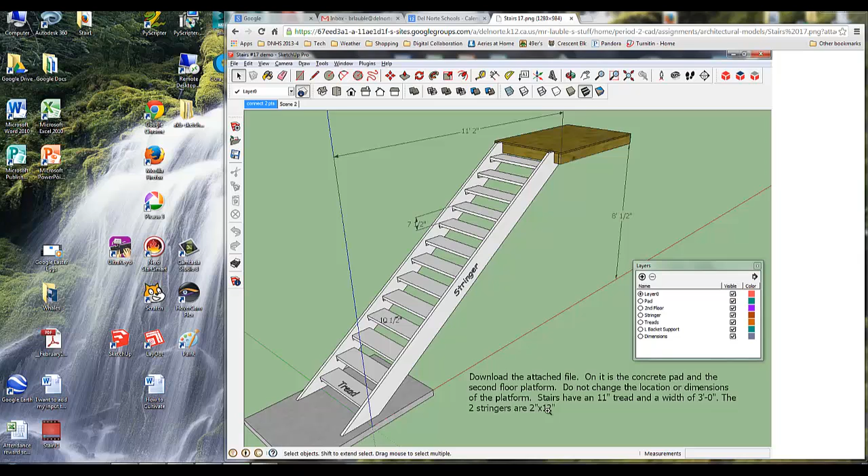All right, now that you've got the treads finished up, you can see here on my website a picture of what this is going to look like when it's done. We're going to make the stringer. Take a look at it - you'll notice it sits flat on top of this concrete pad, and then it cuts into this platform at the top. So we need to make this stringer, and if you look at my directions, it says the two stringers are 2x12s. The real dimension for a 2x12, if you remember, is 1.5 by 11.5.

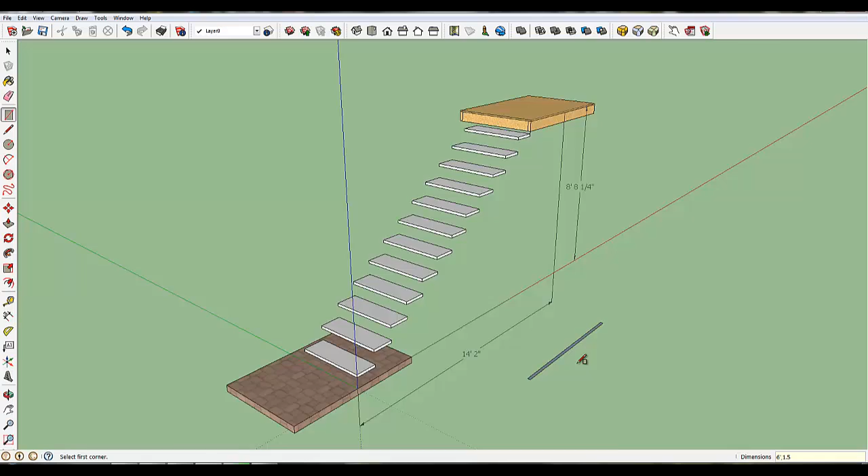So the first thing I'm going to do is create that 1.5 by 11.5 inch board, and you can do that anywhere you want. I'll take a rectangle and just lay this out. In the lower right it's giving me the 6-foot dimension first, so let's make this thing 6 feet long, and here's where the 1.5 inch thick board is - that's the end of the board. Now we just need to pull this up and make it 11.5. So that's the size of the piece of wood, except the length is way off, but that's okay - we're going to start with it really short and make this work.

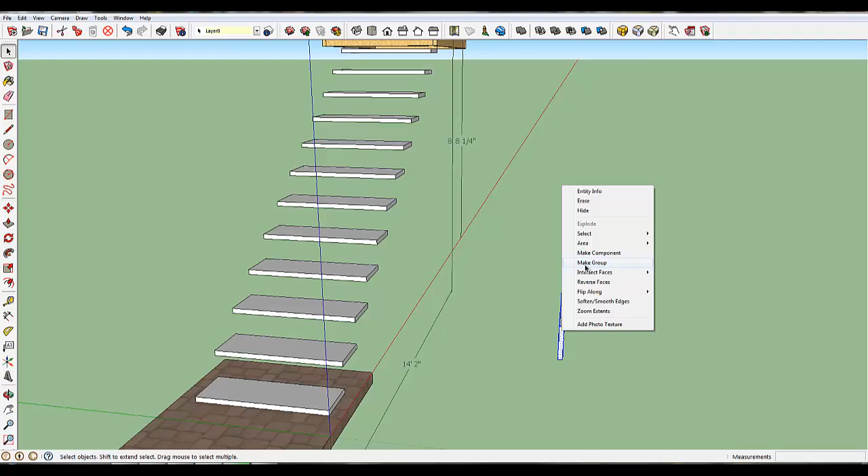The first thing I want to do is group this. If you don't group it, it's not going to work right. So let's group it, and then I'm going to drop this corner right here on the corner of one of the steps. It really doesn't matter at this point which one you drop it on - I'll grab it and drop it on the corner of one of those steps.

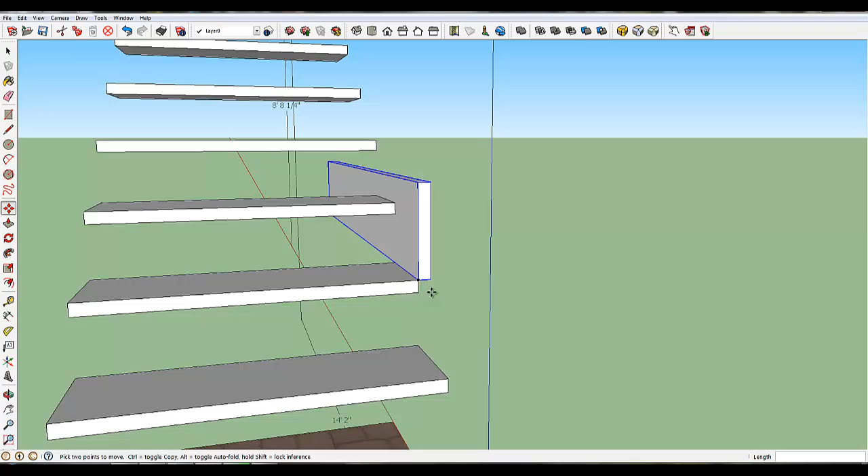Now what I've got is my stringer attached to this corner, and I can rotate this up so that it's at the correct angle. I'll hit Q for rotate, grab this corner, come out here a little bit - it doesn't matter how far - and rotate up. Now you can see I can just go touch one of those steps, and now my stringer is at the perfect angle. It's exactly right.

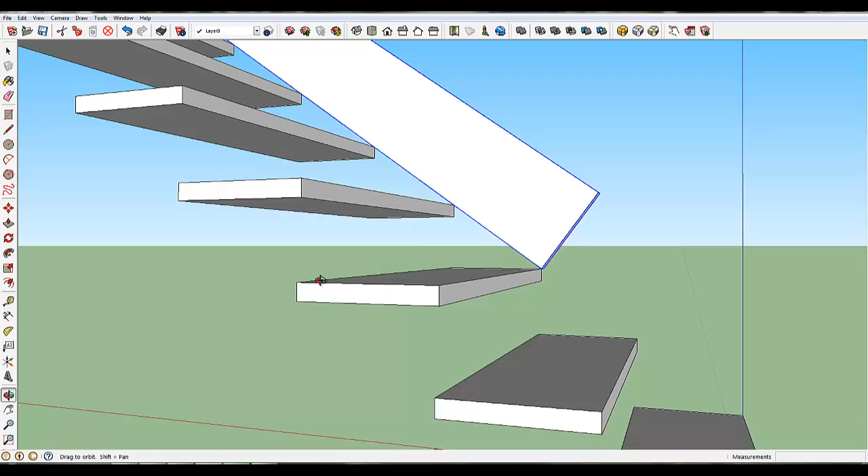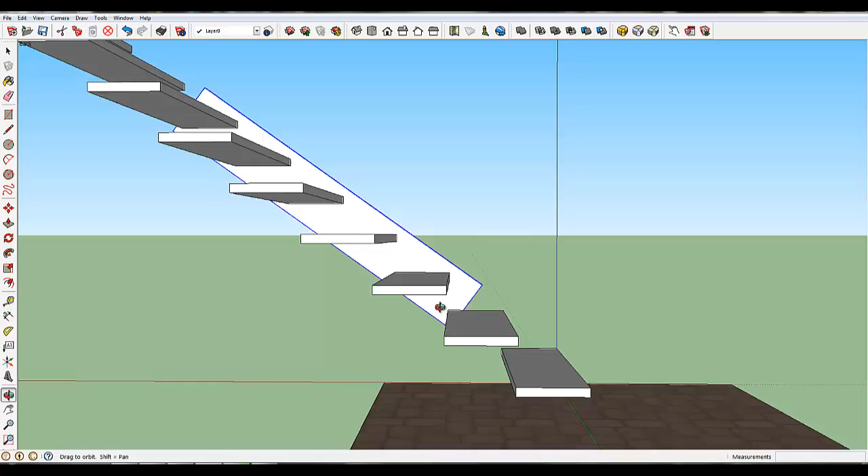Now I can move it down, and I think I'm just going to move it straight down here. On the Z-axis, you can see the blue line that's following me. I'm going to move it down so it's somewhat centered on the stairs. That looks pretty good. So now I've got a stringer that's there hanging on the side of my steps.

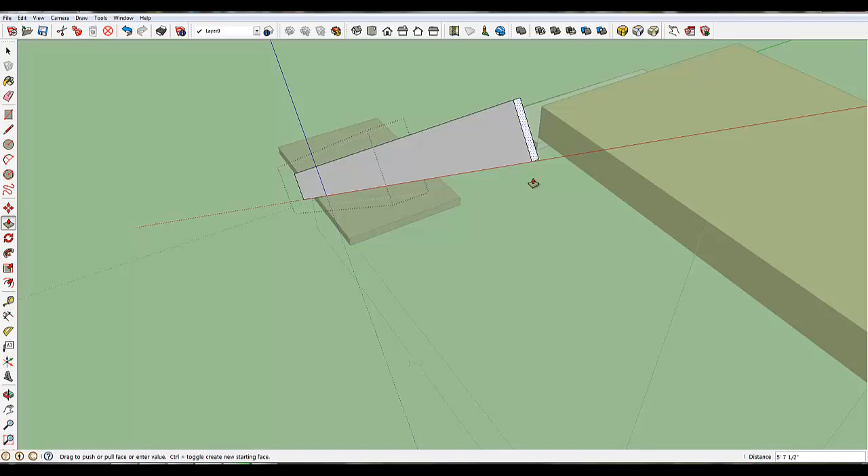So if you're thinking ahead, what do I need to do now? Well, the right answer is it's a group, so I have to double click on it, and I'm going to push-pull this down. I can pull it down anywhere here - it doesn't really matter how far, but I'm going to pull it down so that it hits roughly the corner of this. I think I'll go a little bit past it. Then I'm going to take this end and pull it up past here, because I'm just going to trim off all the extra that's there.

So now I've got one stringer in. You're going to make one stringer, make it perfect, and then copy it over to the other side. Now that I've got this stringer done, I can draw a line from here to here so that I can push this surface back.

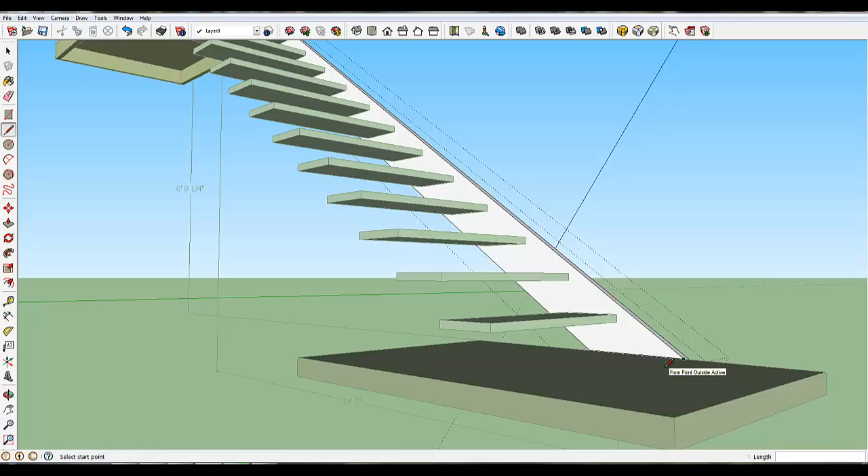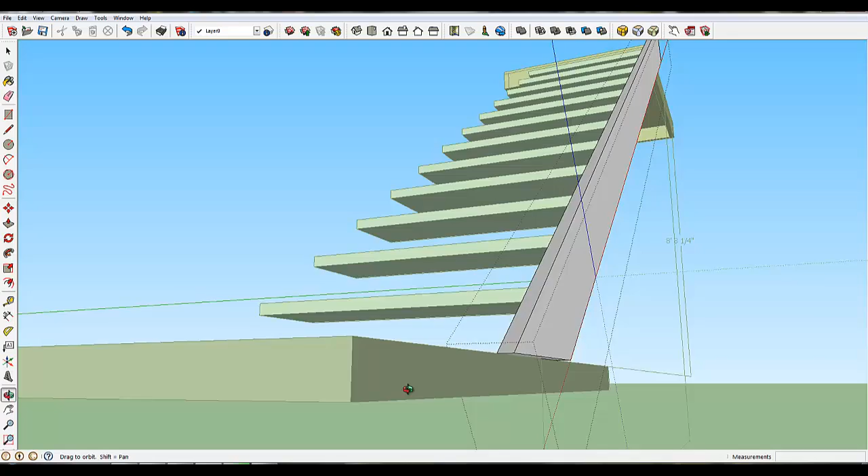I'm going to turn on X-ray now so you can see what I'm doing. Down here you've got the extra board hanging out, and if I use push-pull, I can push this back now, and you'll see it cut it off right there. I'll turn the X-ray back off so you can see what I've done - I've cut it so it's perfectly flat sitting on that concrete pad. So that's one end finished.

You're going to do the same thing up here, but it's going to be a little more complex because you've got to cut around this object up here. So we'll do that in the next video.